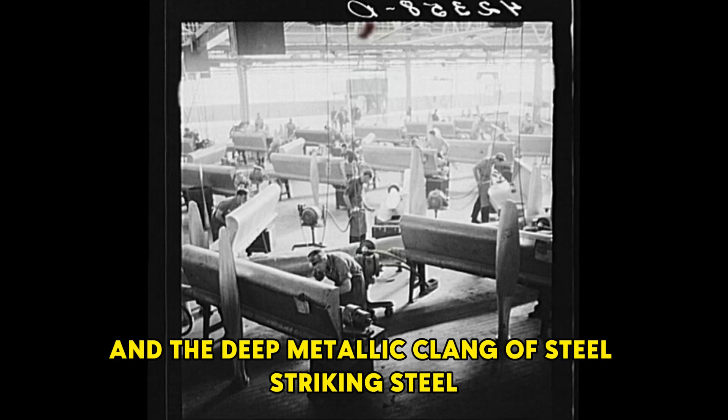In the winter of 1932, the sky over the state of Connecticut was covered with a pale grey hue. Inside the Hamilton Standard plant in East Hartford, one could clearly hear the wind whistling through the tin roof and the deep metallic clang of steel striking steel. In the middle of the test chamber filled with the smell of oil and smoke, engineer Frank Walker Caldwell, 43 years old, stood before a gleaming steel shaft.

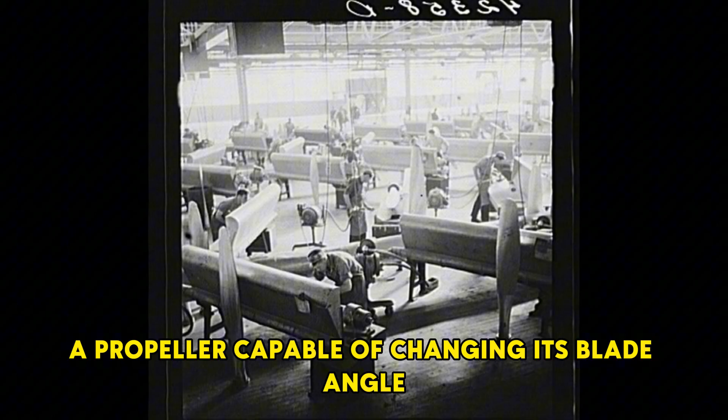Atop the shaft, an aluminum alloy propeller was being prepared for a test that most American engineers had predicted would fail. Caldwell's idea was considered a defiance of mechanical law, a propeller capable of changing its blade angle automatically while spinning at 2,400 revolutions per minute.

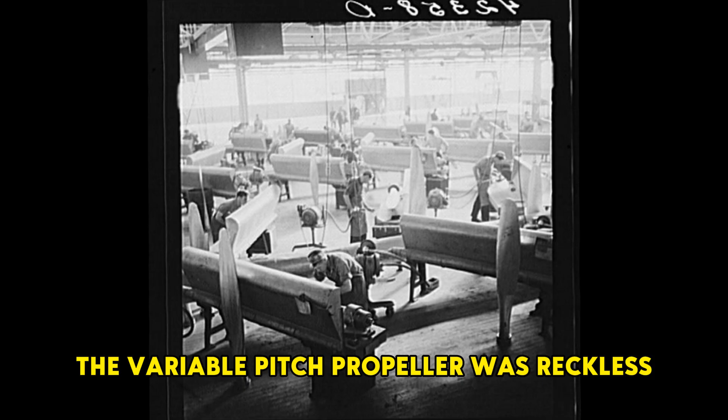From technical schools to the War Department, the reaction was the same. Engine experts at Curtiss-Wright insisted the variable pitch propeller was reckless. They claimed the centrifugal force at the blade tips would exceed 20 tons, enough to snap any control mechanism. 'No moving part can survive that stress,' one engineer remarked at an American Aeronautical Society conference.

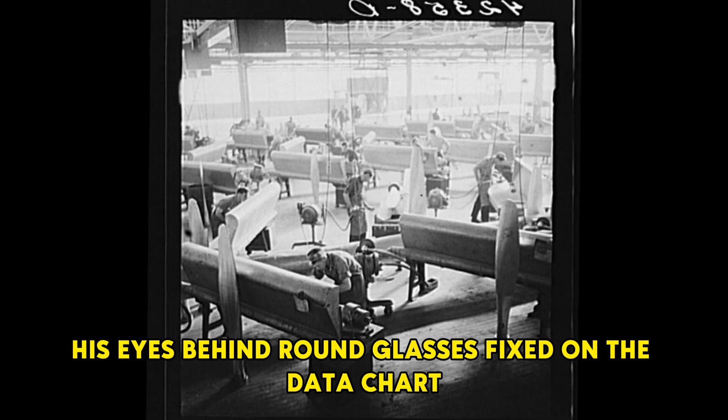Caldwell remained silent, his eyes behind round glasses fixed on the data chart. He believed the answer lay not in debate, but in numbers. 'If the math works, the metal will follow,' he wrote in his engineering notebook.

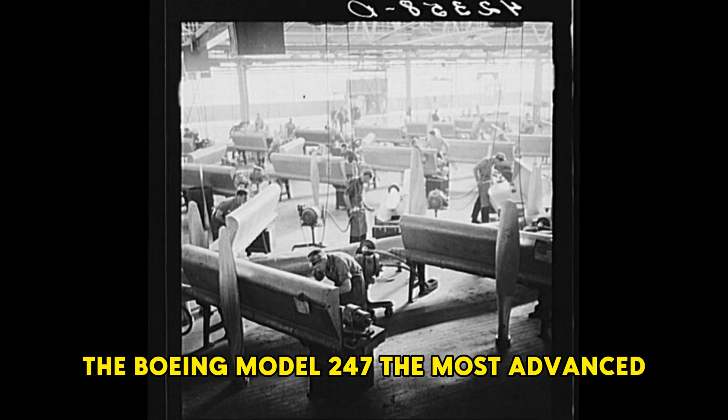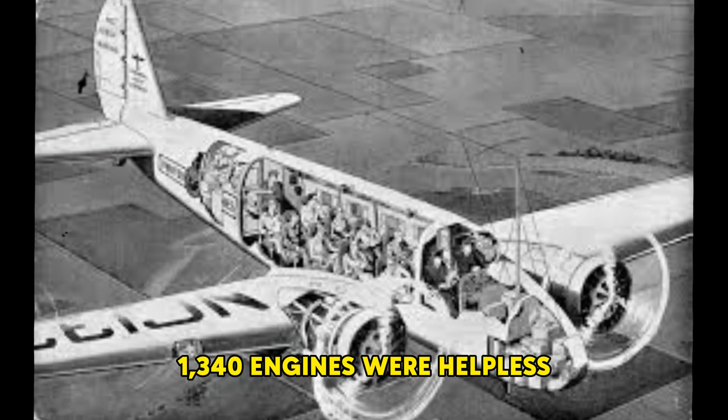Three days later, a phone call from Boeing Field in Seattle opened the door to destiny. The Boeing Model 247, the most advanced passenger aircraft in the United States, was stranded at the Denver airport, unable to cross the Rocky Mountains. Its two powerful Pratt & Whitney R-1340 engines were helpless because the fixed wooden propellers were optimized for only a single airspeed. At an altitude of 5,280 feet, the thin air prevented the aircraft from generating enough thrust.

Pan American Airways sent an ultimatum to Boeing: 'Fix it, or we're buying Douglas.' The U.S. civil aviation industry was about to lose faith in domestic technology.

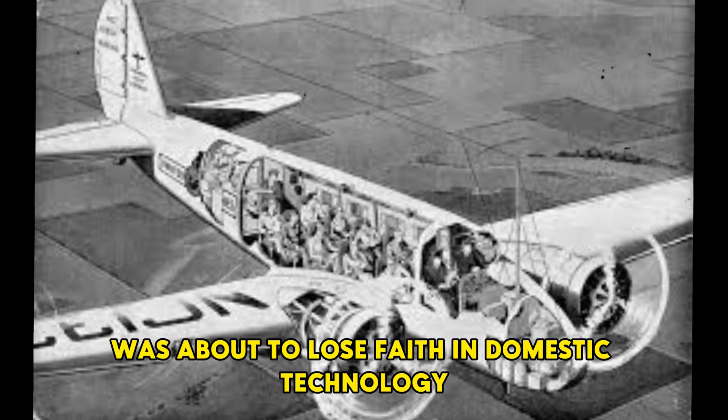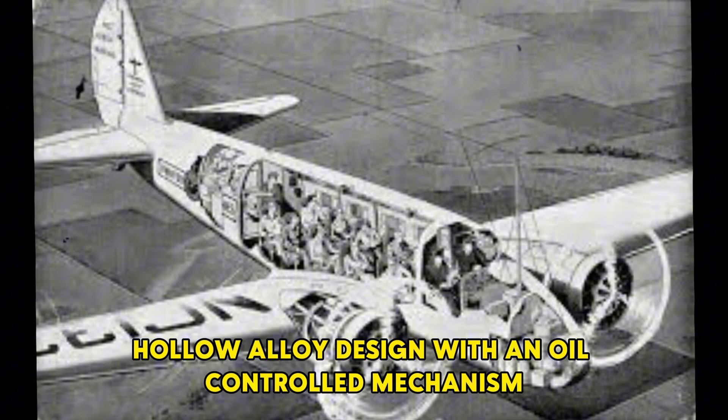Caldwell proposed an immediate test in East Hartford. He mounted the new propeller, a 3-blade hollow alloy design with an oil-controlled mechanism, onto the test stand. Engine oil pressure was channeled through the hollow shaft into a piston connected to a system of gears. As engine speed changed, the piston rotated the blades accordingly. In theory, the blades would adjust their pitch just like an automatic transmission in a car.

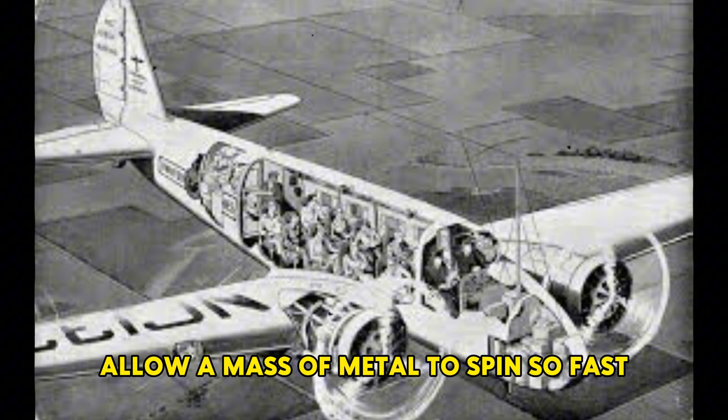The problem was that no one had ever dared allow a mass of metal to spin so fast while still containing internal motion. Caldwell watched the gauge needle reach 2,400 revolutions per minute, sweat forming on his hands. The shriek of the auxiliary wind fan merged with the deep roar of the engine. The propeller blades blurred into a white ring of light. When he adjusted the pressure valve, the rotation remained steady. Nothing exploded. The machine ran smoothly.

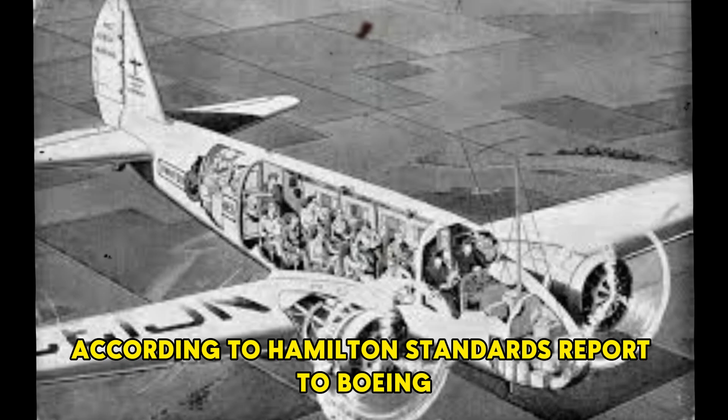He smiled. According to Hamilton Standard's report to Boeing dated the 15th of February 1933, the Model 247 equipped with the new propeller successfully took off. The aircraft climbed to 20,700 feet, crossing the mountains in harsh weather conditions. Cruising speed increased by 15 miles per hour, and fuel efficiency improved by 12%.

Test pilot Eddie Allen telegraphed the company: 'Constant speed propeller exceeds all performance claims. Recommend immediate adoption for the entire United fleet.' Silence filled the control room in East Hartford as the telegram was read aloud. Then someone clapped, and the applause spread throughout the factory.

The press called it the impossible propeller. But Caldwell spoke not of miracles, he spoke of equations. In a short presentation, he described the principle: oil pressure from the engine moves the piston, transferring force to the centrifugal governor. As speed increases, the governor weights expand, adjusting the oil valve and changing blade angle to maintain stable RPM. The aircraft automatically finds a balance between thrust and speed.

According to a report from the Massachusetts Institute of Technology in 1933, Caldwell's test model demonstrated the ability to maintain RPM within plus or minus 1% at all flight altitudes. Scientists called it mechanical intelligence for the first time, a device that could optimize itself without human input.

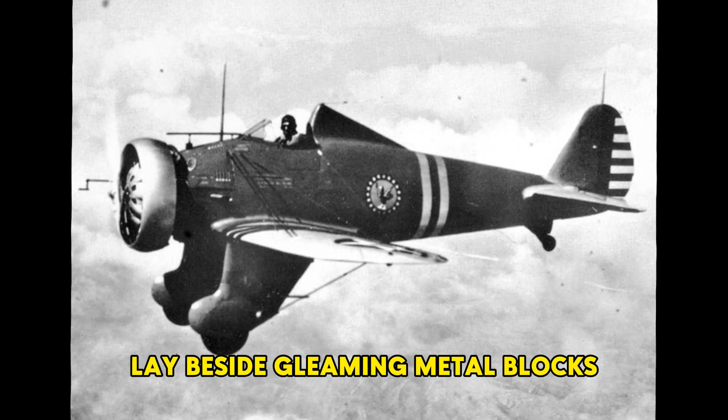Morning at Hamilton Standard in 1934, the East Hartford plant had changed completely compared to two years earlier. On the drafting tables, blueprints filled with numbers lay beside gleaming metal blocks. The once impossible propeller had stepped out of the laboratory and entered the production line.

Each propeller assembly consisted of 47 components, machined with a maximum tolerance of 0.001 inch, a level of precision that many American industrial firms at the time had yet to reach.

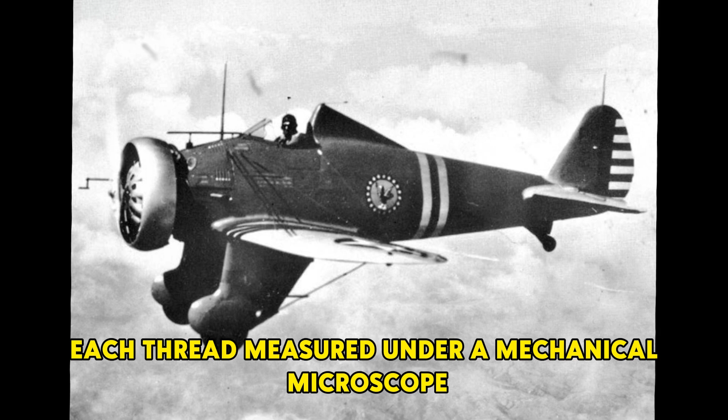The lathe operators spent hours adjusting their cutting blades, each thread measured under a mechanical microscope. Under the fluorescent light reflected from the steel tables, the small components shimmered like shards of glass.

A deviation no greater than a strand of hair could make the shaft vibrate at 2,400 revolutions per minute, destroying the entire system in its very first test.

According to Hamilton Standard's internal records, Caldwell required all workers to sign inspection slips for each part before assembly. "Every measurement is a promise," he said in the Monday morning meeting. The young machinist stayed silent, knowing that the promise was not to the company, but to the sky ahead.

Each completed propeller crate was packed and sent to the U.S. Army Air Corps testing base in Michigan, where a single demonstration could decide the future of American aviation technology.

On the 21st of March 1934, at Selfridge Field, two Boeing P-26 Peashooter fighter aircraft stood side by side on the mist-covered runway. Both had Pratt & Whitney R-1340 engines, but one used a fixed-pitch propeller, while the other was equipped with Hamilton Standard's constant speed propeller.

From the control tower, dozens of officers and engineers watched closely. Caldwell stood below, grey coat, notebook in hand. When the signal came, both aircraft started their engines, the sound of two different heartbeats.

The first, with the fixed propeller, took 8 minutes 30 seconds to climb to 10,000 feet. The second took only 5 minutes and 40 seconds. At 15,000 feet, the new propeller's top speed reached 203 miles per hour, 16 miles per hour faster than its rival, with a ceiling of 34,500 feet compared to the old model's 28,000 feet.

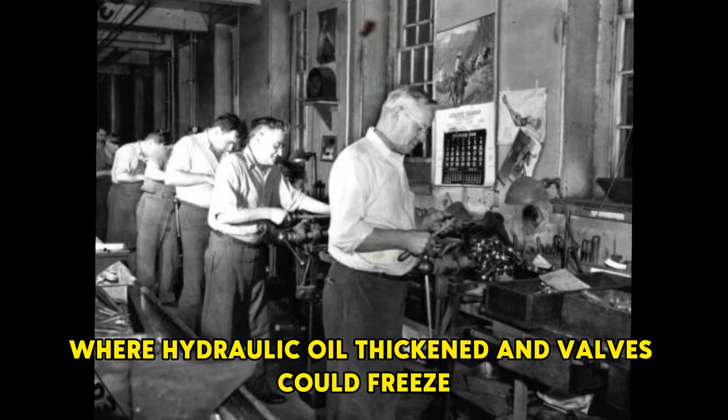As winter came, debates spread throughout the engineering community. Temperatures at combat altitude could drop to 60 degrees below zero Fahrenheit, where hydraulic oil thickened and valves could freeze. "How can a liquid system survive there?" a test officer asked at Wright Field.

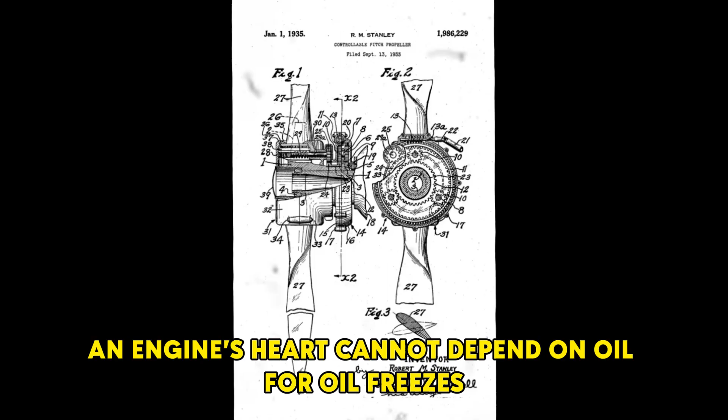The press was skeptical as well. Aviation Review wrote, "An engine's heart cannot depend on oil, for oil freezes." In conference rooms, the tapping of pens replaced applause.

The doubt did not stem from data, but from fear, the fear of losing control to a machine that could adjust itself. Caldwell understood that. He did not respond with words, but with data.

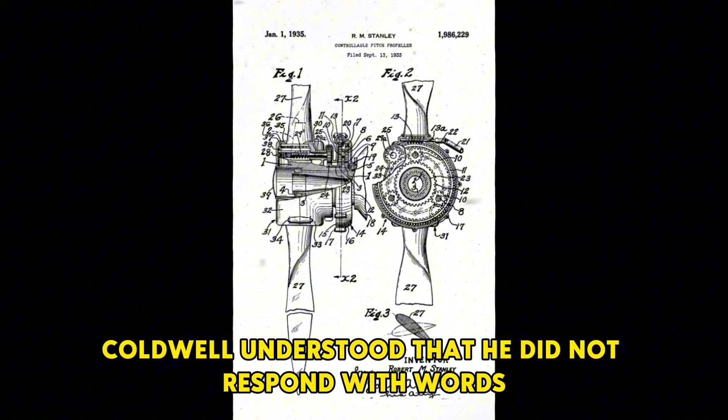In a technical report sent to the War Department in 1935, he presented a continuous 500-hour endurance test under 50% higher load than combat conditions and 75% beyond the safe vibration limit.

According to Hamilton Standard's Engineering Memo 1935-02, not a single part failed, and blade angle deviation after 500 hours was only 0.02 degrees.

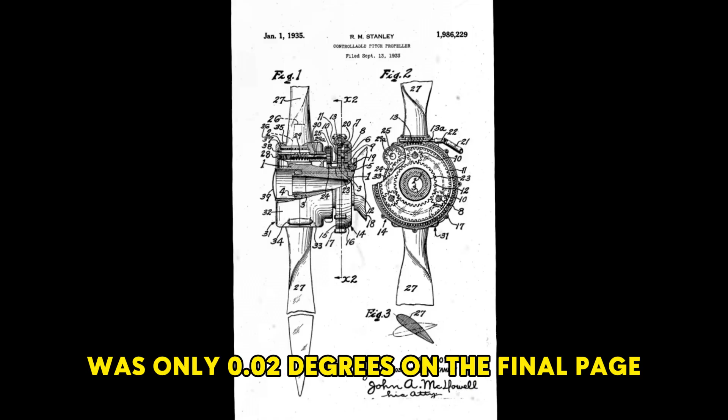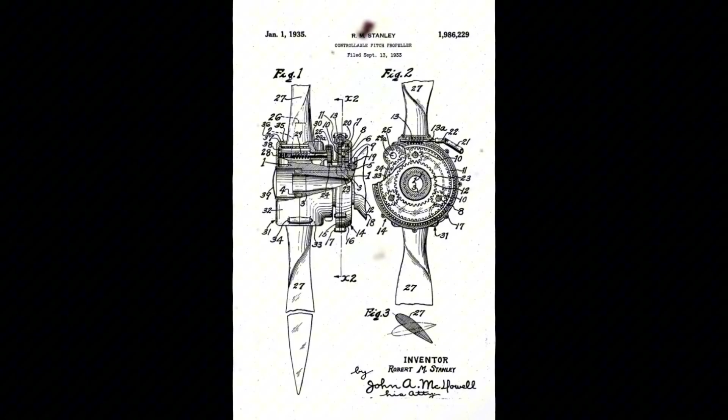On the final page, Caldwell wrote simply, "Complexity does not equal fragility. It equals control." In a closed meeting in Washington, he brought a full-scale governor model.

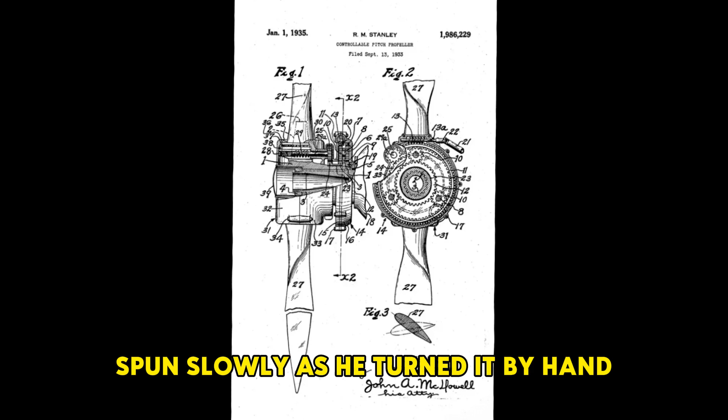On a green felt-covered table, the small device about the size of a coffee can spun slowly as he turned it by hand, its silver metal weights glinting. "Gentlemen, this is not a complication," Caldwell said evenly. "This is precision."

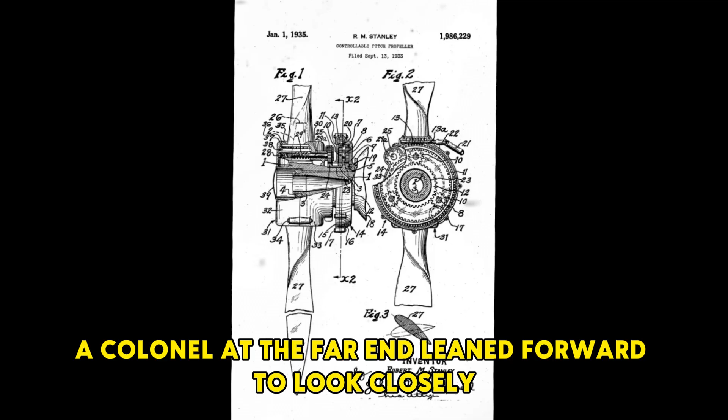The lights shone down, the weights opened and closed with a soft click, like the breathing of metal. A colonel at the far end leaned forward to look closely. "It regulates itself?" he asked. Caldwell nodded. The room fell silent.

According to the U.S. Army Air Corps Test Division Report 1936, the conclusion stated, "The Hamilton Standard Constant Speed propeller maintains rated RPM automatically and safely under all simulated flight conditions." For the first time in American military history, a mechanical system was authorized for autonomous operation.

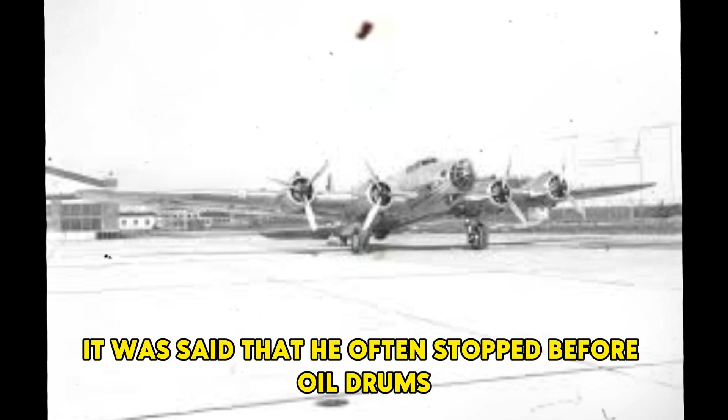In the East Hartford plant, Caldwell walked past rows of running lathes, sparks from welding flashing brightly. It was said that he often stopped before oil drums, giving them a slight shake, then glancing at the pressure gauges, as if listening to the breath of the machines.

One afternoon in 1937, when he returned to the test room, a replica of the propeller once called impossible stood proudly in the display hall. A young engineer asked, "Sir, what's next?" Caldwell replied, "Now we must make it unbreakable."

That marked the beginning of hundreds of subsequent tests, from maximum vibration to simulated impact, pushing every limit beyond imagination. According to the Engineering Review Journal in 1938, Hamilton Standard has achieved what others feared: a propeller that thinks.

Journalists called him the quiet engineer. No grandstanding, no showmanship. Caldwell let the numbers speak for themselves.

In the afternoon light reflected from the aluminum body, he wrote the final line of that year in his notebook: "The machine no longer needs my trust. It has earned it." And there, the mystery ascended to a new level, where the boundary between man and mechanical intelligence began to blur.

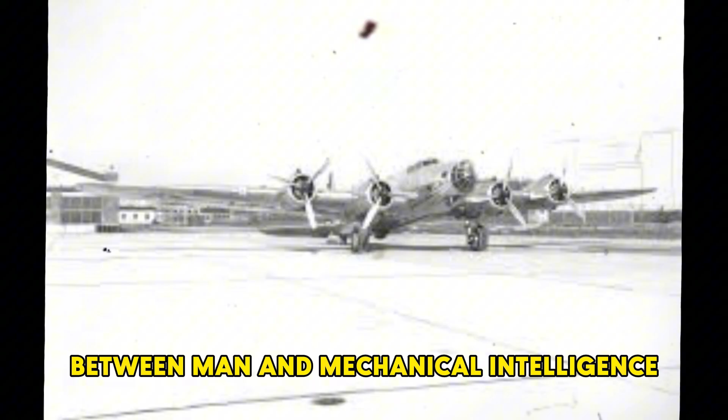When war broke out in Europe, the sky was no longer the realm of commercial flights, but the battlefield of speed and altitude. In 1939, Britain realized that the gap between itself and Germany did not lie in willpower, but in technology.

Over the skies of France, the Messerschmitt Bf 109 climbed effortlessly, while British pilots struggled with the propeller pitch lever, their hands slick with sweat inside cramped cockpits. The Spitfire at that time had only a two-position pitch system: one for takeoff and one for cruising.

To reach an altitude of 20,000 feet, a pilot needed 11 minutes and 8 seconds, over 2.5 minutes longer than their German adversaries. "At that altitude, we could see them climb away and we were stuck," pilot Douglas Bader wrote in his post-war diary. In the first dogfights, that difference cost hundreds of British pilots their chance of survival.

At the British Air Ministry, meetings took place continuously. Reports from the front confirmed that the problem was not in the airframe or the Rolls-Royce Merlin engine—the fault was in the propeller. The technical officers looked across the Atlantic, where Hamilton Standard's constant speed propeller technology had already proven its automatic adjustment capability.

In early 1940, the Air Ministry's Engineering Division signed an emergency contract with de Havilland Propellers Limited, a licensed manufacturer from the United States, to begin conversion trials. According to de Havilland Internal Memo 1940-06, Operation Hatfield was launched under conditions of absolute urgency.

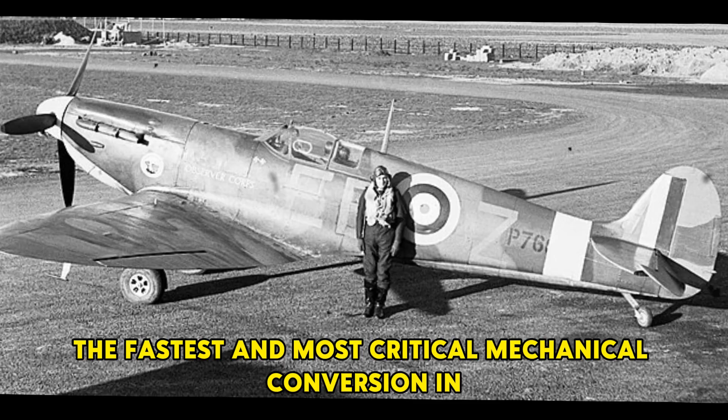Cook landed, stepped out of the cockpit, and looked toward the group of waiting engineers. "She climbs like she was born to fight," he said, his voice hoarse from the wind. According to the report of Air Chief Marshal Hugh Dowding, submitted to the Air Ministry on June 18, 1940, Operation Hatfield was considered the fastest and most critical mechanical conversion in RAF history.

By the end of the month, the entire No. 65 Squadron had been converted, and de Havilland expanded the process to other squadrons. "The Americans had the theory, but we had to turn it into survival," wrote Chief Engineer Harold Penrose in his memoir. "They not only replicated the design, but also had to relearn how to manufacture it."

The problem was not the blueprints. "The British had blueprints," aviation historian David Edgerton noted, "but not the production chain." The propeller required hydraulic oil with stable viscosity at 50 degrees Celsius, but that specific oil existed only in the United States.

Meanwhile, British factories were restricted by wartime materials. "We built it right, but it didn't spin right," a de Havilland engineer recalled in a 1972 interview.

In every factory, workers had to relearn how to machine hollow shafts, hand balance blades, and check pressure with mechanical gauges. The allowable tolerance was only 0.001 inch, an almost impossible figure under wartime conditions.

Night after night, Hatfield glowed like an industrial torch. Amid the wail of air raid sirens, mechanics continued to work under the light of oil lamps. A young engineer named Alan Walker wrote to his wife, "We are racing the bombers in the dark, and each bolt we tighten might save someone's sky tomorrow." That line was later quoted in the de Havilland Museum as testimony to the race between engineers and time.

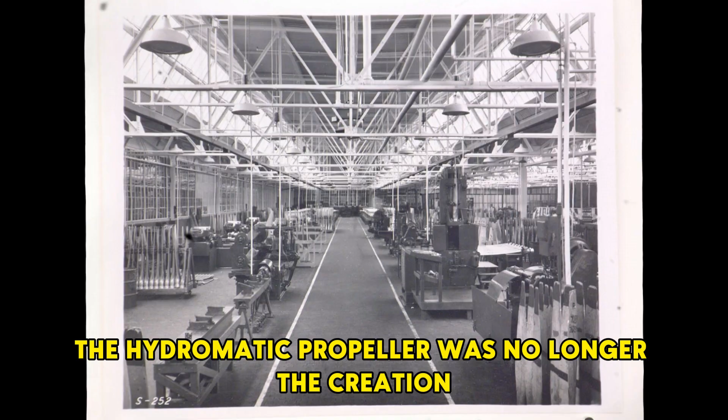The hydromatic propeller was no longer the creation of a small group of engineers. It had become a symbol of American industrial power.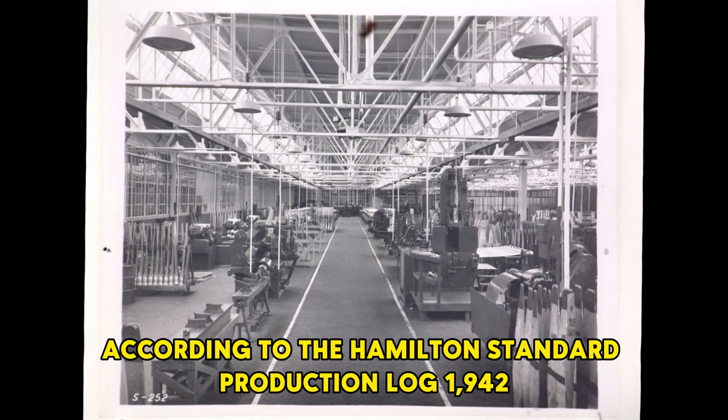According to the Hamilton Standard Production Log, 1942, the production line reached a capacity of 12,000 propeller units per month, an unprecedented figure in aviation history.

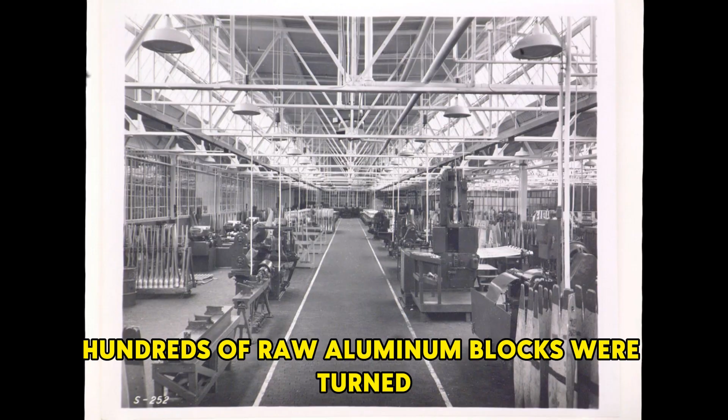The sound from the factory thundered like the heartbeat of a nation preparing for war. In the assembly hall, hundreds of raw aluminum blocks were turned, milled and polished until they shone silver bright. On the wall hung a slogan, "Every blade saves a pilot."

Caldwell walked through the rows of machines, coat stained with oil, eyes fixed on every spinning shaft. "They must all spin the same way," he told the shift supervisor.

Each propeller was a self-regulating micro-mechanical system, and to make thousands of them function in harmony, Hamilton Standard had to redefine the entire concept of mass production.

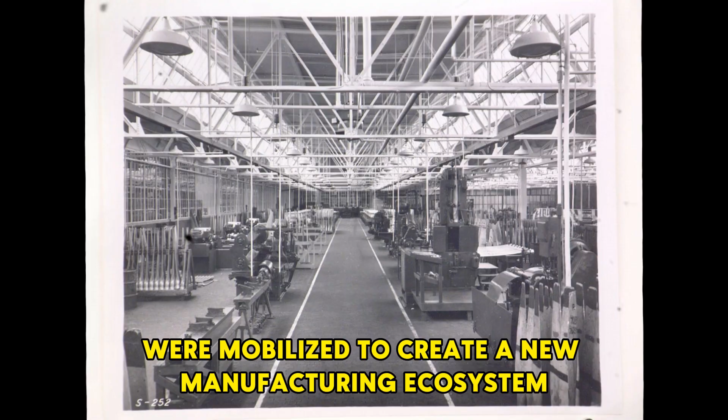According to the War Department Industrial Integration report, 1942, 3 major civilian corporations were mobilized to create a new manufacturing ecosystem.

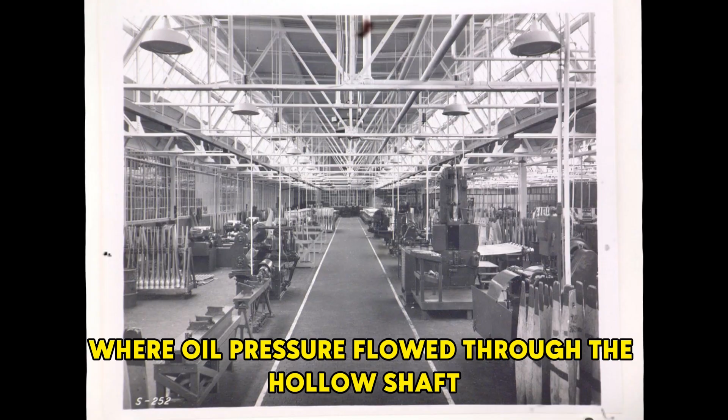Frigidaire, once a refrigerator producer, was assigned to build the hub, the propeller's center, where oil pressure flowed through the hollow shaft. Remington Rand took responsibility for fabricating the Governor, a centrifugal speed control unit smaller than a coffee can yet containing more than 50 intricate parts.

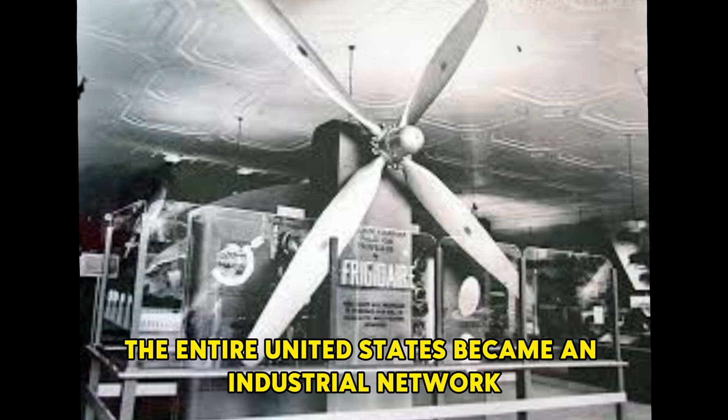Nash Kelvinator, a home appliance manufacturer, switched to producing pistons and hydraulic valves. The entire United States became an industrial network bound together by Caldwell's blueprints. A young engineer at Remington Rand recalled in his 1975 memoir, "We built Governors the way others built watches."

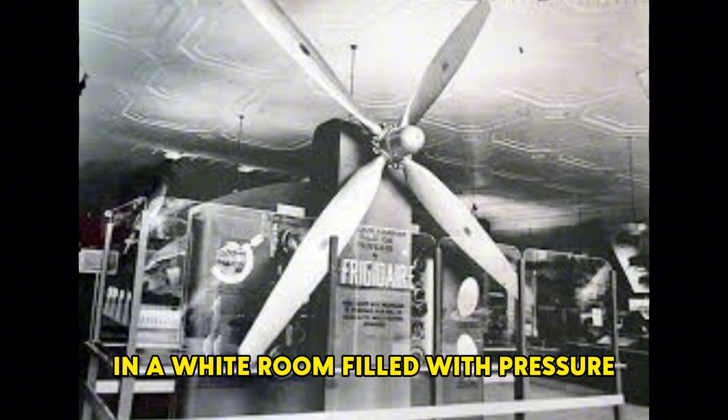At Frigidaire, female machinists sat along the line, fitting rubber seals onto steel shafts, their hands trembling slightly under the precision requirement of 0.001 inch. Each component assembly, once completed, was sent by rail to East Hartford, where Caldwell had set up the central inspection system.

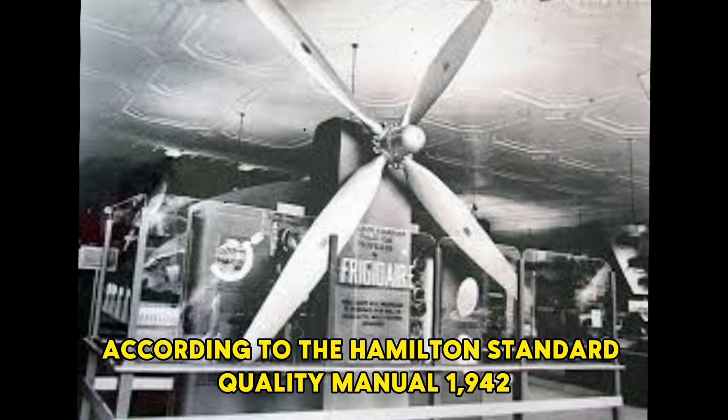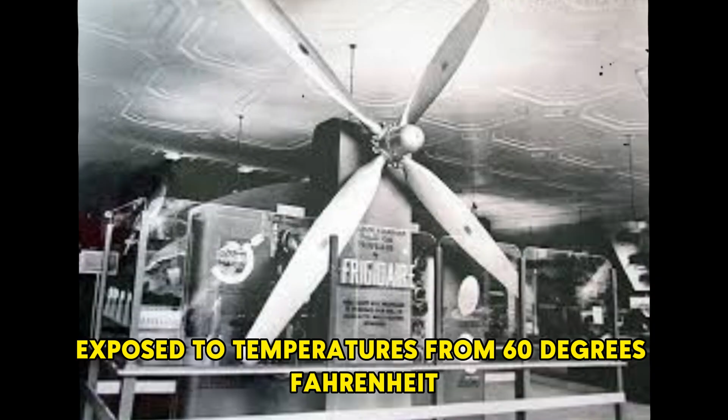In a white room filled with pressure, temperature, and vibration gauges, the propellers were tested under the harshest conditions. According to the Hamilton Standard Quality Manual, 1942, the company's QC process was the first automated model in the aviation industry. Each propeller unit was placed in a testing chamber, exposed to temperatures from minus 60 to plus 140 degrees Fahrenheit, and subjected to vibrations exceeding 75% of normal operating limits. Electromagnetic instruments recorded every fluctuation in oil pressure and blade angle, printing data on meters-long paper strips.

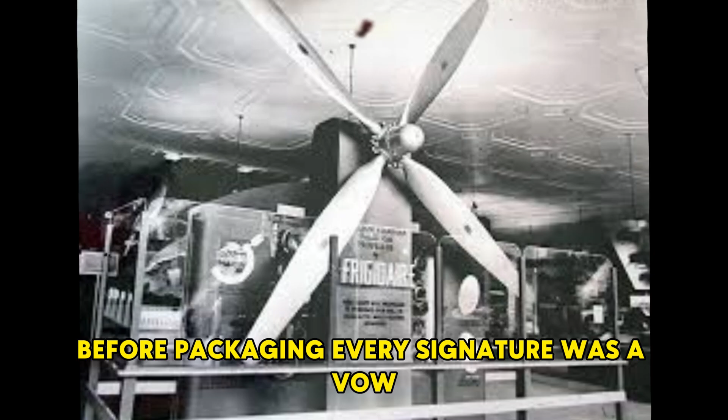After each unit passed inspection, the chief engineer was required to sign directly on the propeller's body before packaging. Every signature was a vow, Caldwell told the management team. That precision made Hamilton Standard the technical lifeline of America's war effort.

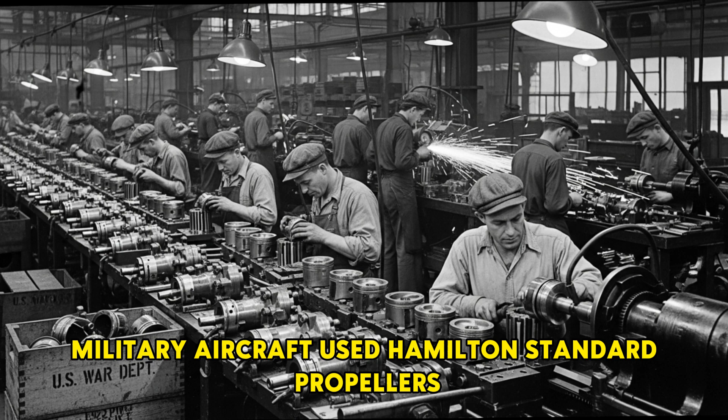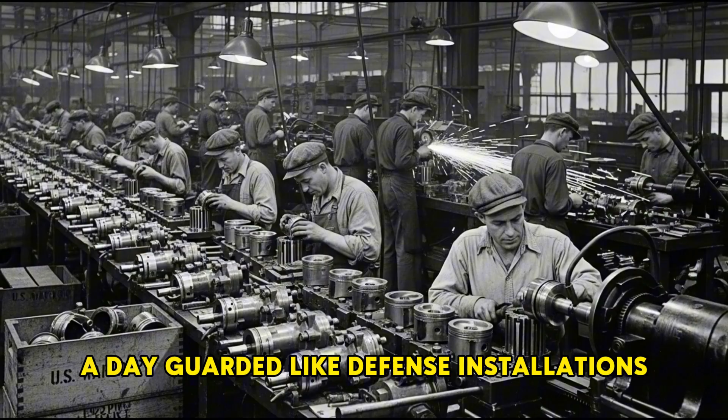According to the United States Office of Production Management report, December 1942, nearly 60% of all U.S. military aircraft used Hamilton Standard propellers. The Frigidaire and Remington Rand lines operated 24 hours a day, guarded like defense installations. It was no longer about building parts, wrote Chief Engineer Arthur Carlson. It was about synchronizing an entire nation's machinery.

But with scale came a shadow. In the summer of 1942, as the United States entered full mobilization, the government ordered a 30% increase in production. To meet the target, Hamilton Standard had to recruit thousands of new workers. Many were farmers, seamstresses, and students who had never touched a lathe. Training time was cut to only two weeks. Caldwell objected, but pressure from the War Department was relentless.

"They need the blades now," an official said, and the production line ran faster. Inside the plant, the hammering of metal sounded like explosions. The temperature rose above 100 degrees Fahrenheit, and oil vapor hung in the air like fog. One engineer wrote in his diary, "The machines no longer rest, neither do we."

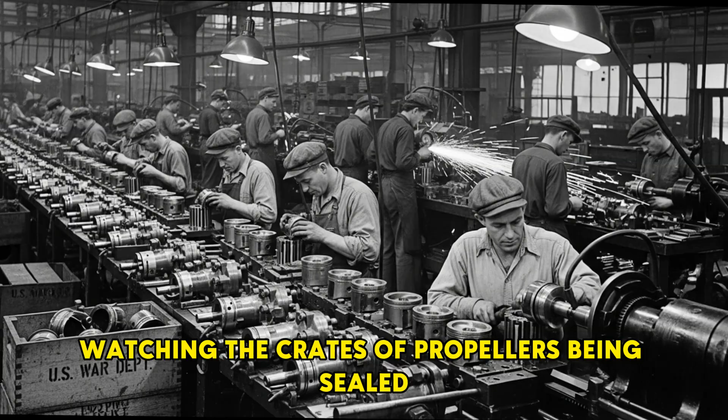As speed increased, so did error. According to the Factory Audit Report, 1942 Q3, the assembly deviation rate doubled compared to earlier in the year. Some governors leaked oil. Several shafts were imperfectly balanced, Caldwell noticed during a night inspection. He stood silently before the conveyor, watching the crates of propellers being sealed, the glow from the forge reflecting off his glasses.

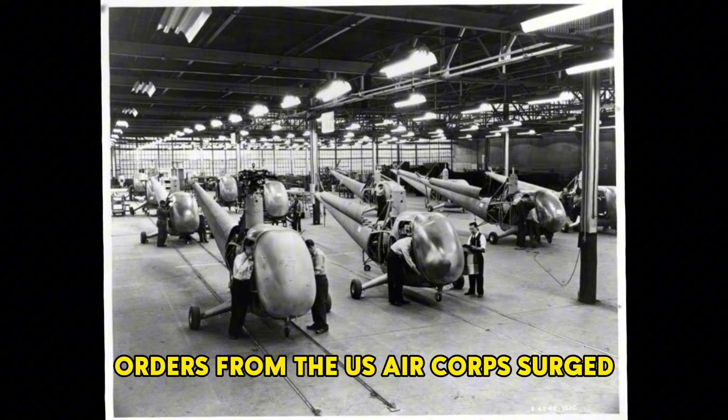"Speed is the enemy of precision," he wrote in a note to the board. But war would not wait. After Pearl Harbor, orders from the U.S. Air Corps surged. The entire nation shifted to a wartime footing. People began to call Hamilton Standard the beating heart of the skies.

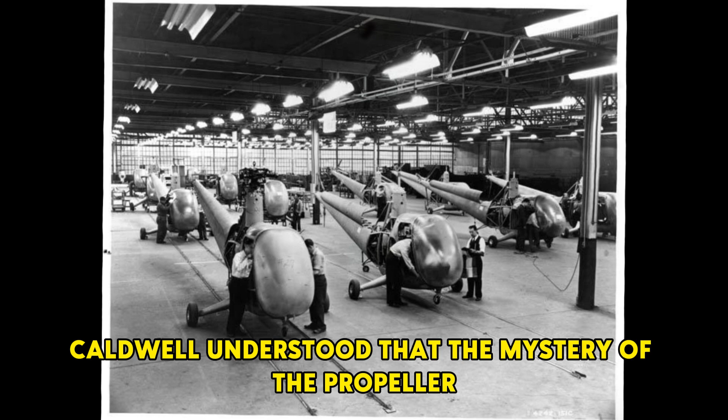Caldwell understood that the mystery of the propeller was losing its original purity as it passed from the hands of engineers into the machinery of mass production. According to the National Defense Manufacturing Record, 1942, in the final quarter of the year, Hamilton Standard shipped 35,000 propeller units, a number far beyond all projections. But alongside it came a 3.8% defect rate, a warning clearly stated in the report.

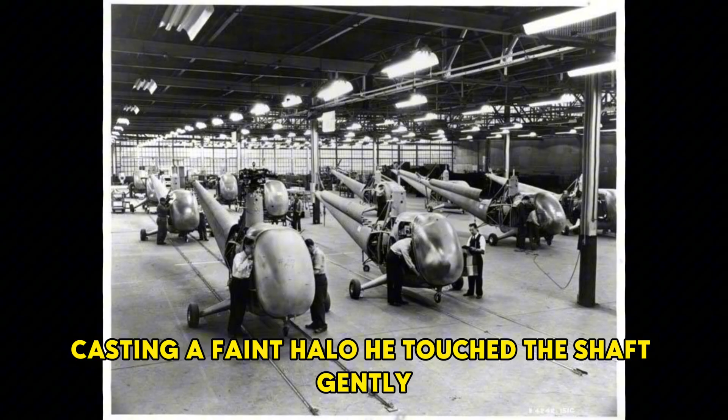Caldwell looked at the dry figures, knowing that what he had built with meticulous care was now being tested by the very scale he had created. On the last night of the year, he returned to the test room, where the original Boeing 247 propeller still hung on the wall. The fluorescent light reflected on the aluminum surface, casting a faint halo. He touched the shaft gently, feeling the cold, damp metal. "Perfection can't be multiplied," he whispered, as if reminding himself.

Outside, the factory whistle sounded the end of the shift. The clang of metal echoed in the dark, like the laboured breathing of a machine that had surpassed its own limits. And within that echo, the mystery took on a new form, from the creation of one man to the assembly line of an entire nation, where every revolution carried both the power and the peril of modern industry.

In the autumn of 1943, when war had turned the skies of Europe into a labyrinth of smoke and fire, America seemed to have achieved perfection in weapons production. Each day, hundreds of B-17 flying fortresses left the factories, equipped with hydromatic propellers verified through hundreds of precision tests. Hamilton Standard announced a defect rate below 2%, an achievement the press called the triumph of precision.

Caldwell read the words of praise in silence. He understood that industry was a giant organism, and sometimes it concealed flaws no one could see. On the morning of the 14th of October, 1943, the formation of B-17s from the 8th Air Force took off from England to bomb Schweinfurt, the industrial centre of Germany. Among them was B-17 serial number 42-31041, nicknamed Hell's Angels.

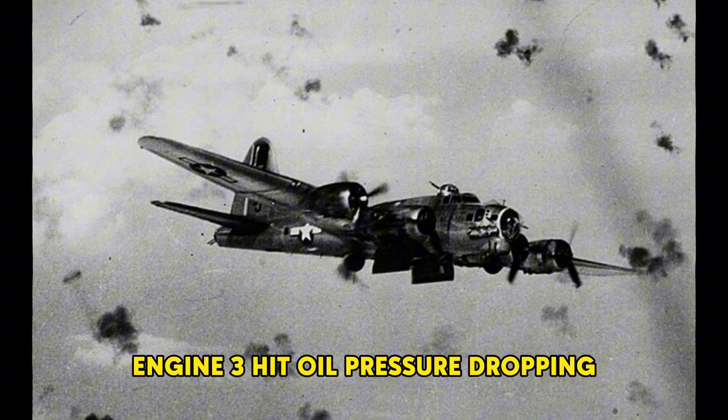Co-pilot Jack Morgan recorded in the radio log: "Engine 3 hit, oil pressure dropping." Following protocol, they activated the feathering mechanism to turn the propeller blades parallel to the airflow, reducing drag and maintaining balance. But propeller number 3 did not respond. Instead of holding position, it reversed into the airstream, creating massive resistance.

Airspeed dropped 40 miles per hour, and the aircraft rapidly lost altitude. Attempts to regain control failed. Parker ordered, "Bail out," but it was too late. At 12,000 feet, the right wing snapped. The Hells Angels spiraled, caught fire, and crashed into the Bavarian forest. All 9 crew members were killed.

The final report contained a single line: feathering mechanism failed due to oil freezing. The news shook the War Department. Within 2 weeks, 3 similar incidents were recorded. A total of 47 propellers from the same production batch showed signs of oil pressure loss at altitudes above 30,000 feet. A technical investigation was launched with unprecedented urgency.

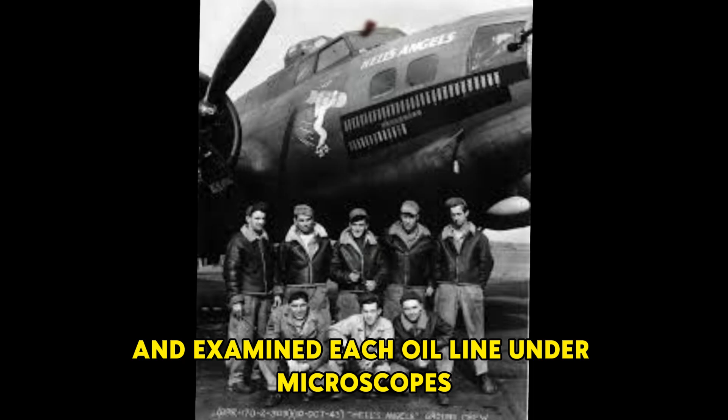At the Hamilton Standard Laboratory, engineers dismantled every component and examined each oil line under microscopes. Inside the oil tubes, they discovered a faint white crystalline residue. Chemical analysis identified it as paraffin and metallic dust mixed in the hydraulic oil. According to Technical Report number 27 over 1943, the contamination originated from a subcontractor in Ohio, where the oil had been bottled hastily without cold filtration. At 30 degrees Fahrenheit, the impurities crystallized, blocking the pressure valves and preventing the propeller from feathering.

When the report reached Caldwell, he remained silent for a long time. In his brightly lit office in East Hartford, he wrote in his notebook, "The machine is perfect, but the chain is not." On November 20, he flew to England aboard a military transport.

At RAF Thorpe Abbotts base, he met pilots of the 8th Air Force repairing surviving B-17s. A grease-stained engineer showed him a fractured propeller hub. "It wasn't your design, sir. It was the oil." Caldwell nodded, his eyes heavy.

He knew the mystery of this failure did not lie in design, but in a supply chain stretched thin by war. According to the records of the U.S. Army Air Force's Investigation Board, Caldwell stayed in England for 3 weeks. He traveled across bases, speaking with pilots, engineers, and maintenance crews.

One evening, in an aircraft hangar under the dim yellow light, he told a group of engineers, "We built a mind that could think, but forgot the veins that feed it." The quote was later included in the official report sent to Washington. It was both an admission and a warning.

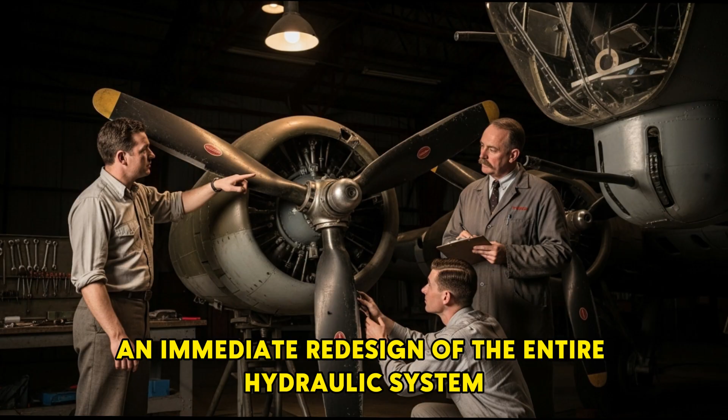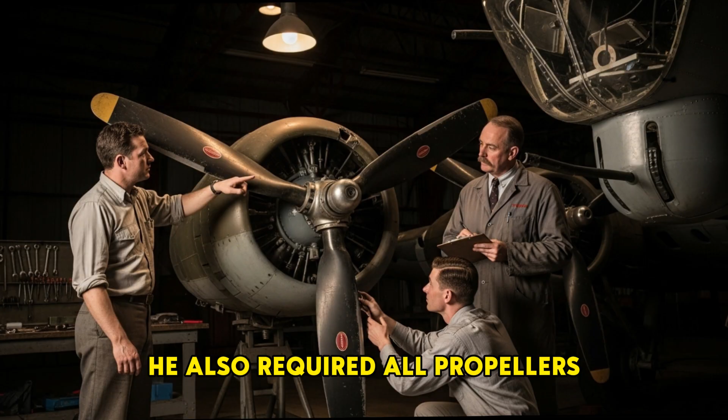Upon returning to the United States, Caldwell demanded an immediate redesign of the entire hydraulic system. The updated model featured 2 independent oil circuits and a mechanical backup mechanism, allowing the propeller to feather even if pressure was lost. He also required all propellers to undergo environmental tests from minus 60 degrees Fahrenheit to plus 140 degrees Fahrenheit, along with vibration endurance 75% above combat standards. Every batch of hydraulic oil was to be sampled, frozen, and thawed at multiple temperature levels to detect impurities.

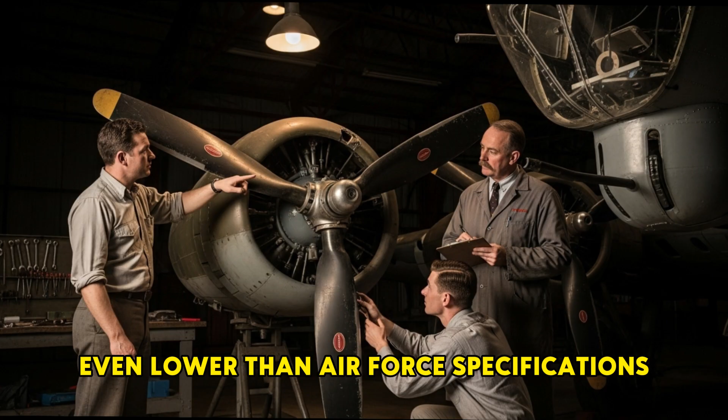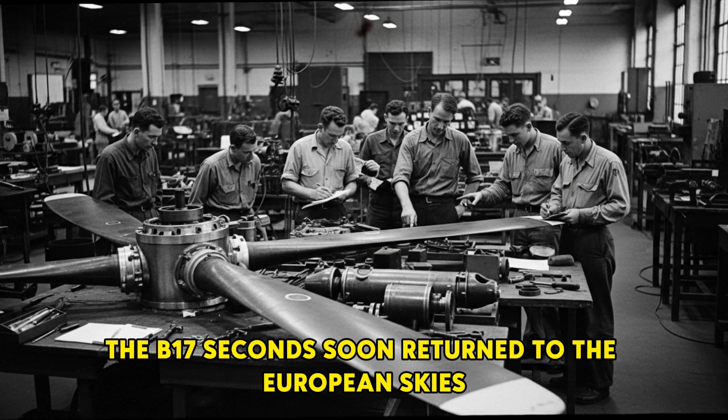According to Hamilton Standard Reliability Memo 1944-01, after 6 months of implementation, the propeller failure rate dropped below 1%, even lower than Air Force specifications. The War Department ordered nationwide adoption of the protocol, naming it the Redundant Hydraulic System Protocol. Journalist Ernest Gann, in his 1944 Saturday Evening Post article, described Caldwell as the engineer who turned disaster into discipline. The B-17s soon returned to the European skies, taking off into freezing fog without fear of their feathering systems freezing solid.

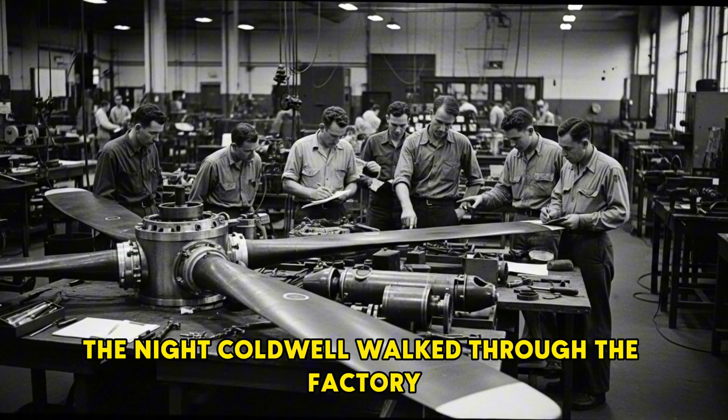A Hamilton Standard engineer later recalled the night Caldwell walked through the factory after returning. He didn't speak. He just touched the new valves lined on the table, one by one. Outside, trains loaded with propellers departed into the darkness, red lights reflecting off the aluminum surfaces.

In the June 1944 report, the Army Air Force's Technical Division noted, "No further feathering failures reported in European theatre since January." The mystery had been broken, but its price was 9 lives. Caldwell kept a copy of the investigation report on his desk for the rest of his life. In an internal meeting, he once said, "Perfection is not an end. It is a moving target."

The mechanical intelligence he had created had learned to repair itself, and America had learned how to sustain that intelligence within a vast system. By the end of 1944, as the new B-17s flew across the North Sea, people said they could hear something different in the engine sound, the smooth, even rhythm of the propellers, flawless and synchronized.

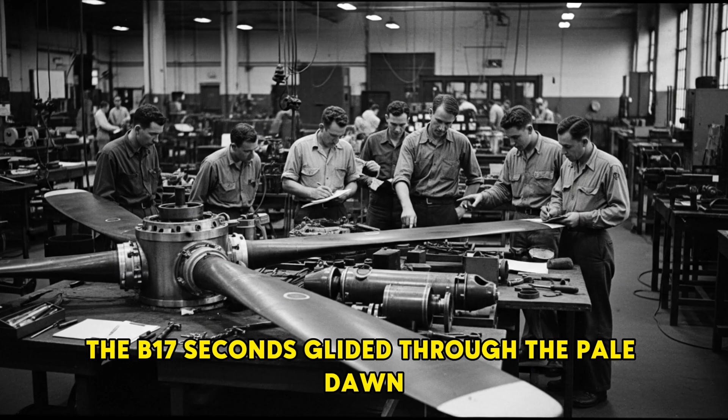According to the 8th Air Force After Action Summary, the mission completion rate of B-17 squadrons increased by more than 20% in just 3 months. Amid the roar of wind and fire, mechanical intelligence had restored faith. And in that moment, over the snowy skies of Europe, the B-17s glided through the pale dawn, as if the mystery had been cleansed not within the metal itself, but in the hands of those who dared to admit mistakes and rebuild the world.

In January 1944, after radical technical improvements following the Hells Angels disaster, the skies over Europe gradually belonged to the Allies. The B-17 and B-24 squadrons of the 8th Air Force began conducting daylight bombing runs deep into German territory. In the technical report, U.S. Army Air Forces Operational Data, January 1944, the figures revealed a clear leap forward. Each B-17 Flying Fortress could now fly 50 miles per hour faster, reach altitudes 8,000 feet higher.

While consuming nearly 15% less fuel than previous versions, the hydromatic propeller system, with its ability to automatically adjust blade pitch, had turned an inert block of metal into a system capable of adapting to every layer of air, every change in the engine, every breath of wind at 40,000 feet. According to the technical briefing, 8th Air Force 1944, superiority was no longer a claim for conference rooms. It was manifest in every battle.

Over Berlin, while German early warning radar was still analyzing signals, the P-51 Mustangs appeared like silver arrows. Thanks to the self-adjusting propeller, the Mustang's cruising speed was 30 miles per hour faster than the Bf-109 and its ceiling 5,000 feet higher. American pilots could now decide when to fight and when to disengage, a privilege never before possible. "It climbs like thought itself," said Lt. George Preddy after the Battle of the 18th of June 1944, when he downed 3 German aircraft in just 8 minutes.

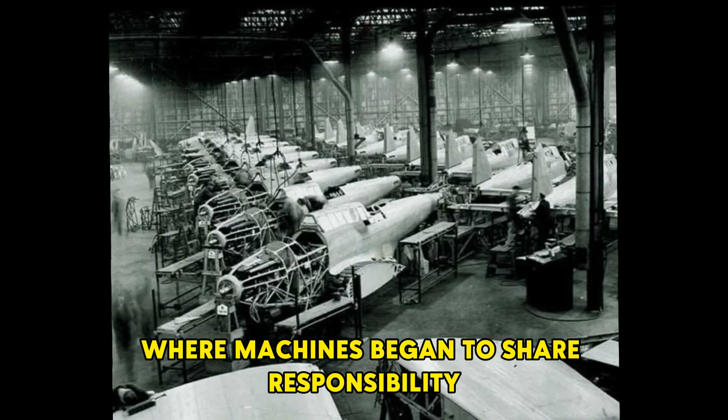According to the post-war study, Aviation Psychology Division Report 1946, pilots' neural fatigue levels decreased by nearly 30% on missions lasting more than 6 hours. The propeller could listen to the engine, knowing when to change its angle to keep the RPM steady. This automation was not just a technical convenience, but the first step toward intelligent mechanical thinking, where machines began to share responsibility with humans. At an internal meeting in Washington in 1944, a senior officer told Caldwell, "Your propellers changed the sky."

He replied simply, "We just let the machines think for us." The phrase spread among aviation engineers as a new philosophy. Efficiency came from trust in data and systems.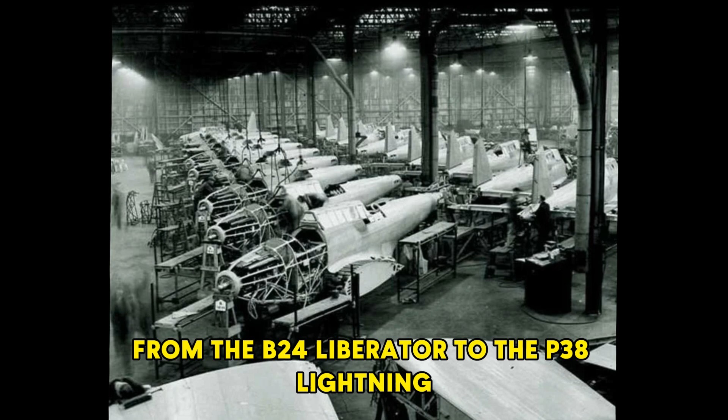As the war entered its final year, the scale of hydromatic propeller technology reached global proportions. According to the U.S. War Production Board Summary 1945, more than 530,135 propeller units had been produced for combat and bomber aircraft, from the B-24 Liberator to the P-38 Lightning, from the P-47 to the B-17. Every American aircraft, from Europe to the Pacific, bore Caldwell's design.

In factories across Connecticut, Michigan, and California, the conveyor belts never slept. Workers changed shifts to the blare of steel whistles, and shining propeller blades lined the floors like the swords of a mechanical army. According to the Strategic Air Force's Evaluation 1945, Allied technical superiority lay not only in quantity, but in the quality of each machine.

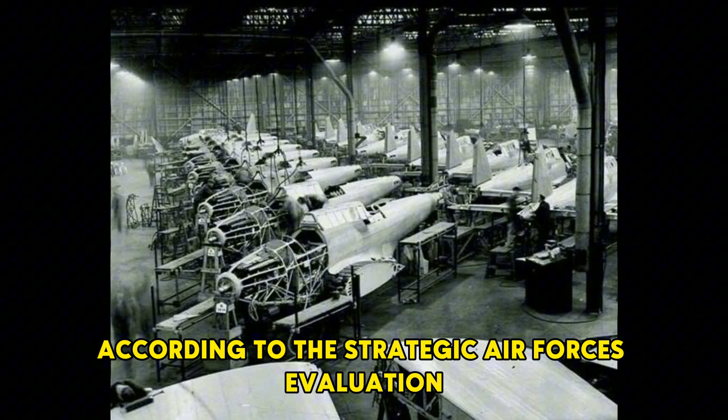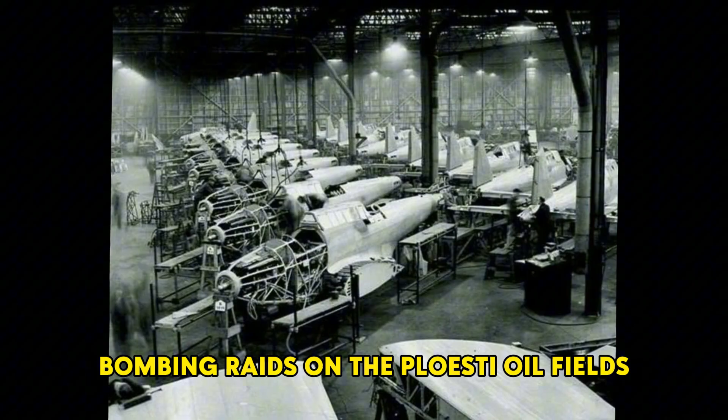Bombers could fly higher, farther, and beyond the range of enemy anti-aircraft fire. From altitudes above 30,000 feet, bombing raids on the Ploesti oil fields and the Ruhr industrial zone became more accurate than ever. "We could stay up there, above their reach," recalled pilot Harold Stovall. "Our props never failed." By August 1945, when the war ended, the U.S. Army Air Forces released a report titled Impact of Variable Pitch Technology on Air Superiority.

The final figure was staggering. The automatic propeller system had saved approximately 15,000 aircraft from being shot down or forced to crash land due to engine failure. According to the Army Air Force's 1945 summary, the survival rate of bombing missions increased by 18% compared to 1943. In a world ruled by probability and death, that number was a miracle.

On the 2nd of September 1945, at Tokyo Bay, as Japan's surrender was signed, B-29 Superfortresses circled overhead, all equipped with propeller technology derived from Hamilton Standard's hydromatic system. In the dim sunlight, their blades spun into silver circles, reflecting on the sea like giant clocks marking the dawn of a new era.

Caldwell was in his East Hartford office. He heard the news over the radio, one hand resting on the old Boeing 247 blueprint. From that first test in 1933 to victory in 1945, it had taken exactly 12 years for an impossible idea to become the foundation of global triumph.

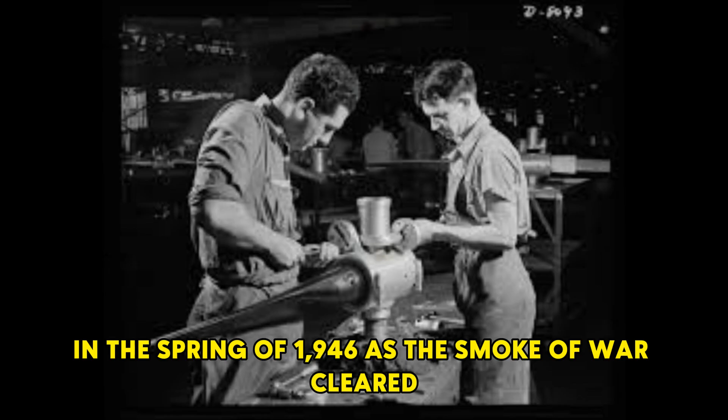In the spring of 1946, as the smoke of war cleared, the Hamilton Standard factory in East Hartford still glowed with light. The production lines that once built thousands of hydromatic propellers now serve civil aviation. On the office walls, charts and the slogan, 'Quality is not inspection, it is discipline,' reflected a new focus, the art of precise control.

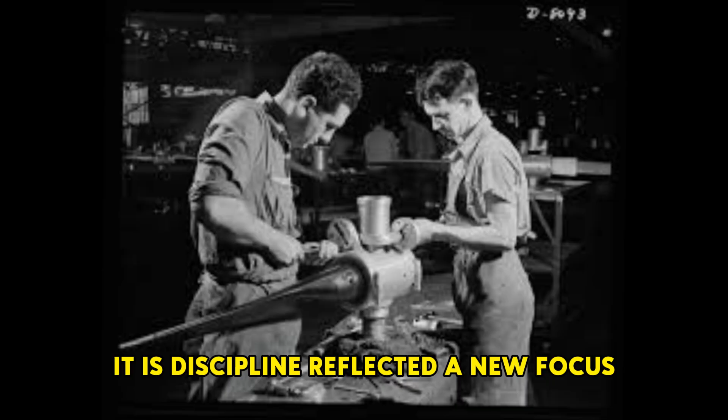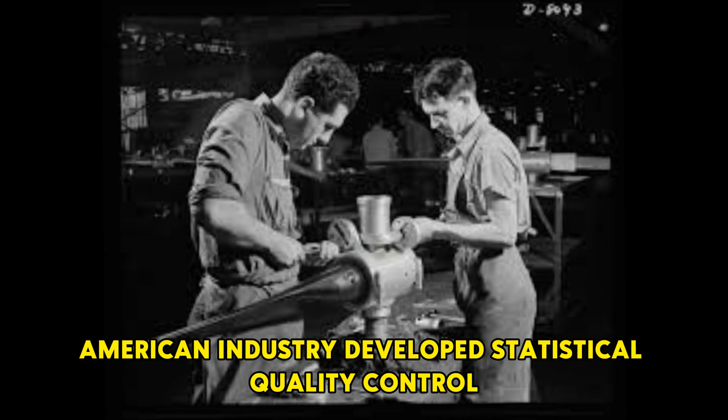According to the U.S. Bureau of Standards Report 1946, from Hamilton Standard's inspection methods, American industry developed statistical quality control. Every variable - vibration, pressure, blade angle - was recorded and analyzed.

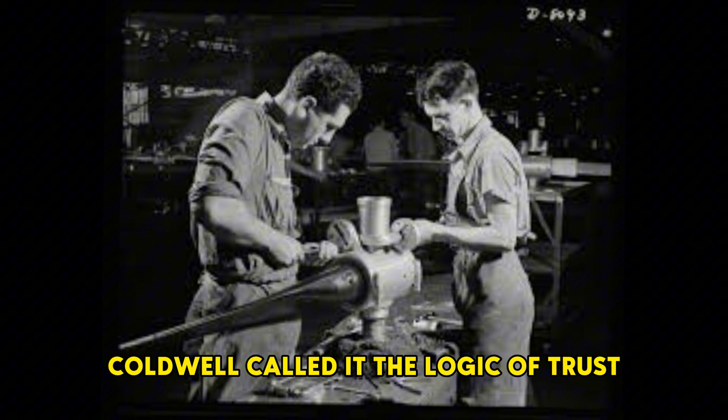Caldwell called it the logic of trust. Believe in data, not feeling. Engineers learned to read charts like doctors reading heartbeats. A small deviation could save a life.

At the 1947 ASME conference, Caldwell's speech, 'Learning from the Machine,' stated, 'The propeller taught us to measure, not to assume.' The quote marked a turning point in U.S. engineering. From Ford to Boeing, factories adopted statistical production.

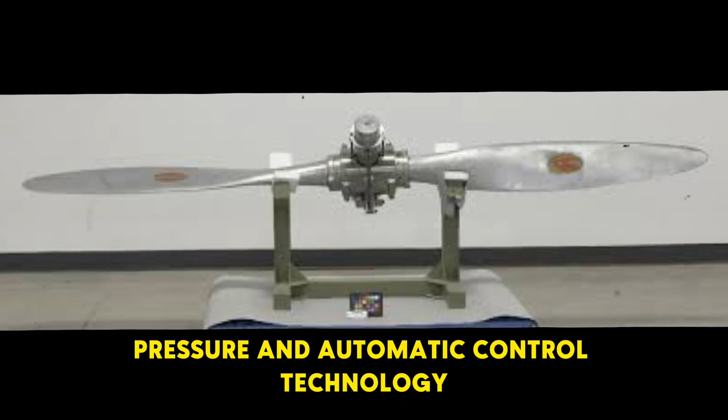An error rate below 1% became known as Hamilton Standard precision. By 1948, oil pressure and automatic control technology spread across industries. The automotive field used it to create automatic transmissions. Shipbuilders refined hydraulic governors. Machine tools adopted centrifugal balancing systems. A once over-engineered device had become the backbone of modern engineering.

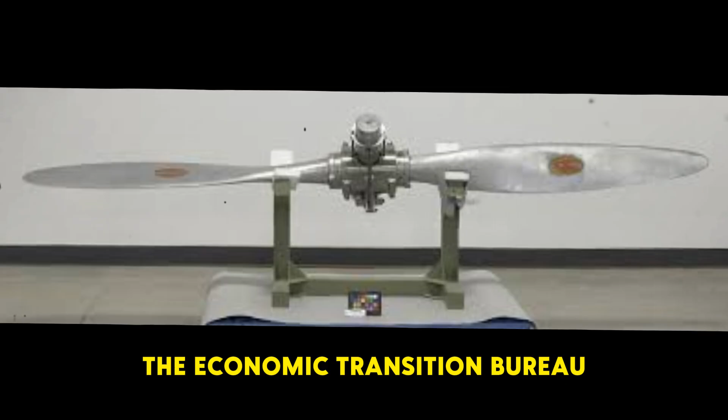The Economic Transition Bureau's 1950 report stated that self-adjusting hydraulic systems contributed over 12% of U.S. industrial GDP, about $25 billion. Thousands of Hamilton Standard engineers joined new industries. One, Arthur Carlson, wrote, 'We left the war, but the war left us with precision.'

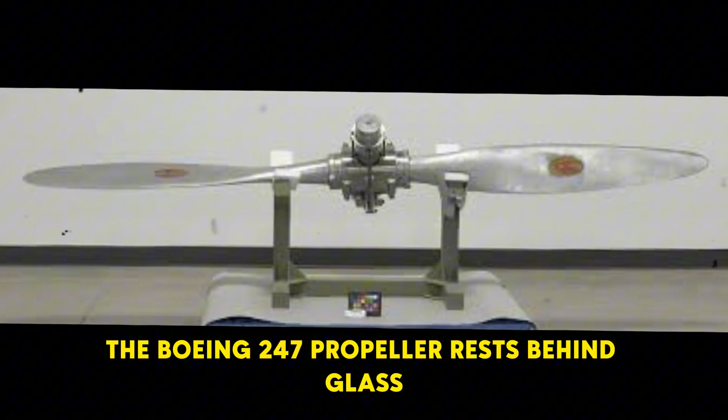At the Smithsonian, the Boeing 247 propeller rests behind glass. Its plaque reads, 'This was the first machine that thought mechanically.' Historian David Mindell noted Caldwell's design marks the moment when machines began to anticipate rather than react. That concept, mechanical intelligence, opened a new era.

In the MIT Lecture Archive, 1952, Professor Harold Hazen asked, 'Can a machine think in numbers?' Students answered: the propeller already had, two decades before. Caldwell died in 1963, aged 74. At his funeral, colleagues placed a piece of hydromatic propeller aluminum on his grave. One whispered, 'He gave wings a brain.'

By 1965, hydromatic systems powered over 60% of civilian aircraft. Hamilton Standard produced 200,000 hydraulic components yearly, expanding into missile and aerospace work. Beneath Caldwell's 1933 photograph at headquarters, the motto read, 'Perfection is measurable.'

From war tests to global industry, preserved archives told one story: the rise of mechanical intelligence. And today, when pilots take off in computer-controlled cockpits, they still hear that same sound - the propeller adjusting to the wind, the enduring heartbeat of an idea born in 1933.

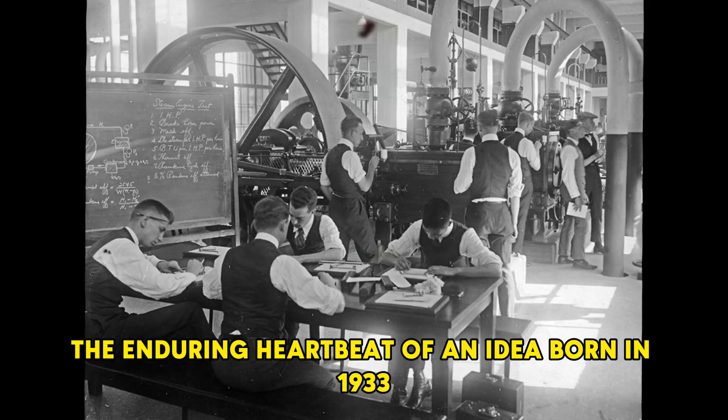The propeller has been decoded, yet the mystery Caldwell left behind endures: the question of artificial intelligence's limits, the boundary between man and machine. Each time the engine starts and the propeller begins to spin, the numbers from those old data sheets seem to come alive again. They remind us that perfection is never static, it keeps turning, like the endless motion of the invention that changed the world.